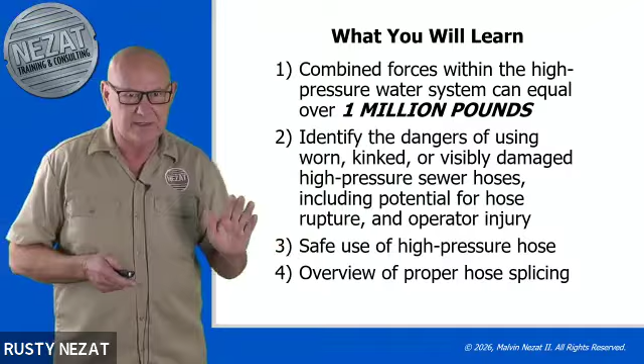So what you're going to learn today is about the combined forces of over 1 million pounds in the high pressure water system. We're going to talk about a damaged hose and using damaged hose, the safe use of high pressure hose, and an overview of proper hose splicing. I know some of you don't do your own hose splicing, but if you do, you need to hear what I'm going to say today.

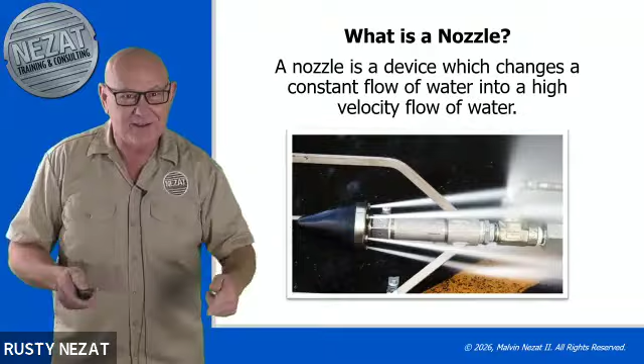So let's start off with the nozzle - that attaches to the end of the hose, this is what goes on the end of the hose. A nozzle is just a device that changes a constant flow of water, 80 gallons a minute, into high velocity, where it comes out really, really fast. The reason being, it goes in through this big hole and comes out through a bunch of little holes - this is about 1 inch, and this hole over here is about a 1/4 inch. So the area is being squeezed down, so the water's got to come out faster - that's what makes it high velocity.

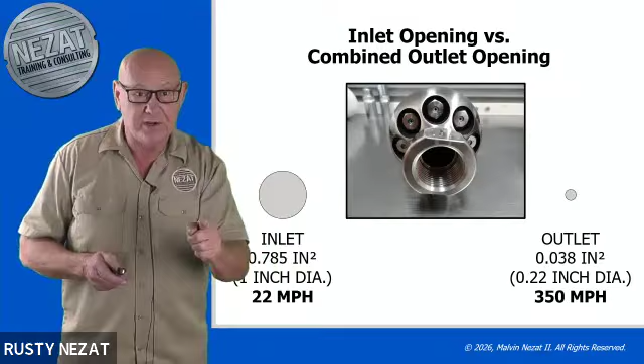So the water going into a nozzle goes in at 22 miles an hour. When it comes out of this nozzle, it's going to be traveling at 350 miles an hour. These nozzles are deadly - people have been killed with these things, maimed and injured. Okay, I'm going to show you a little graphic picture - put your hand over your eye if you don't want to see it.

Oh, not yet. That's the next one.

So, sewer worker killed by a nozzle. In 1999, a gentleman was out there cleaning line, and his nozzle turned and came back on him. I realized what happened because I've seen this happen recently. We were cleaning the line, the nozzle went into a dead end manhole, came up the pipe, and I'm screaming. It came up the manhole, flipped over, and went back down the hole, and now it's going back toward the operator. That's how this person was injured.

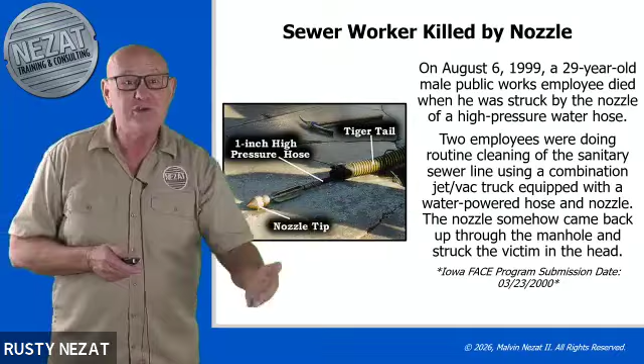When it comes out of the manhole, which they always do when they travel back to you, they're going to turn. They're going to come right up out of the manhole. Bam! Hit him right in the head.

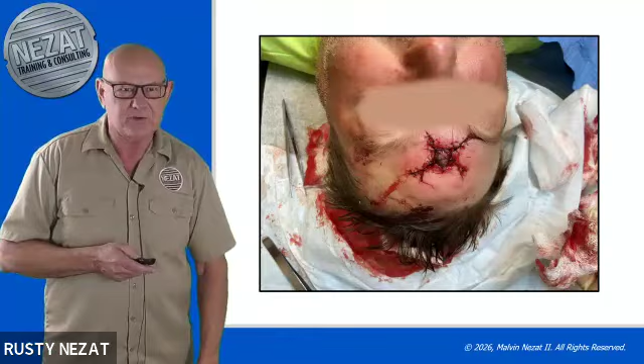So this is an epidemic.

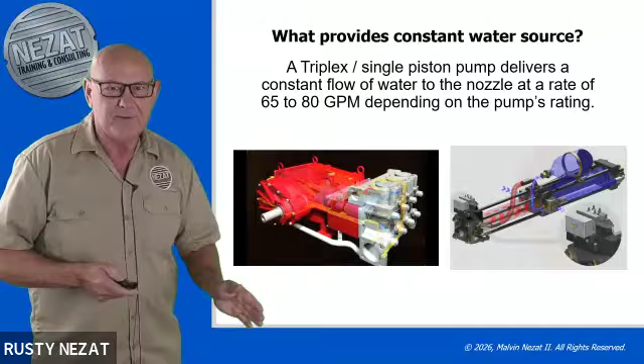So this is where you get your constant flow of water from - from the pump, okay? A unit running like 600 feet of hose at 2,000 PSI can contain 1.2 million pounds of force. You might say, what? My truck only runs 2,000 PSI, Rusty. Yeah, but that's 2,000 pounds per square inch. If you add up all the square inches in the sewer hose and the truck, all the piping, you'll come up with about 1.2 million pounds of combined force.

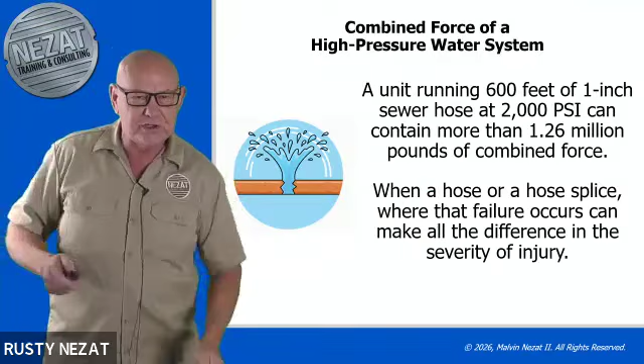When a hose or a splice fails, depending on where it fails, that's going to tell you how serious the injury is going to be. It could come apart in the line, or inside the hose reel. But if it comes apart in that 5-foot area between the ground and the top of the hose reel and you're exposed to it, that's where the injuries take place.

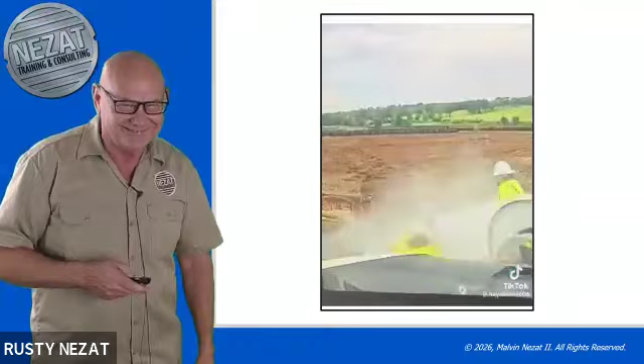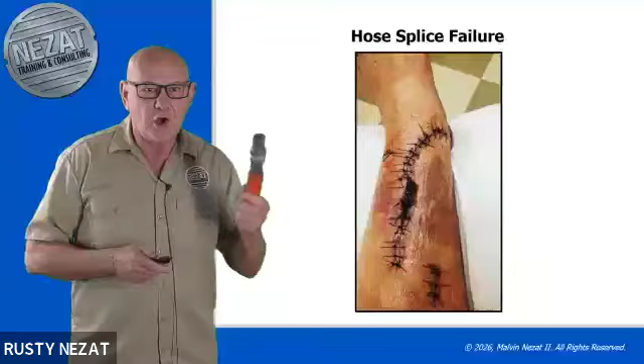1.2 million pounds of force. Now, this was a gentleman I did some training with down in Florida, and he gave me these pictures. After he saw our training programs, our Sewer 102 - one of our modules is about hose splicing - he came to me and said, let me give you my pictures. He said the hose splice came apart as it was coming out of the manhole, and when it came apart, it hit me in the leg.

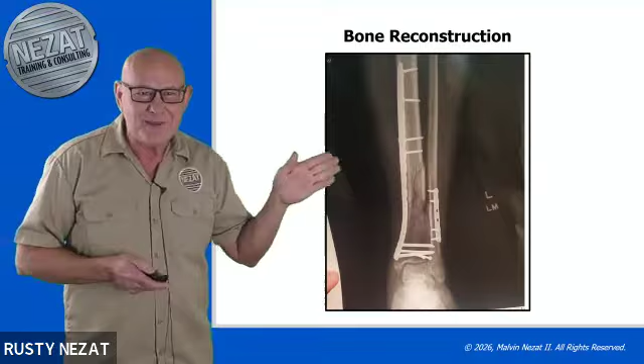And this is what it did to my leg. Now, the reason he's all stitched up like that is because they had to rebuild the structure of his leg. You can see here this bone is shattered. All that had to be put back together, and they got steel plates in there and got him all screwed back together nice and tight. He's back up and functional now. But that was 1.2 million pounds of force coming out of that fitting when it came apart.

Now, let's prevent hose splice failures.

If you're going to make your own splices, you need to use the proper tools and proper procedures. If you go online, there are manuals on how to make proper splices.

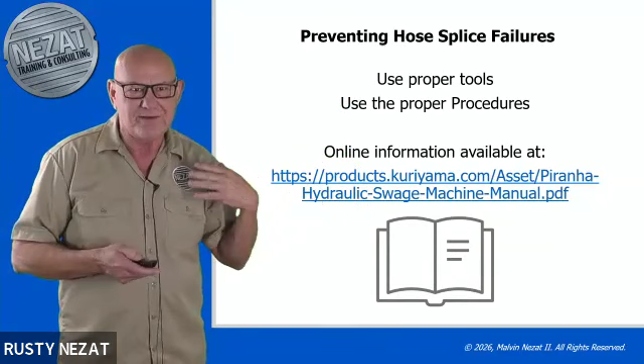The hose we're going to be talking about today is Piranha hose. That's my favorite hose. As I've traveled the country, I believe it's probably the safest hose on the market in my opinion. Now, warning, this is in the manual: failure to read our instructions covering hydraulic swage machine repair manual for usage could result in injury or death.

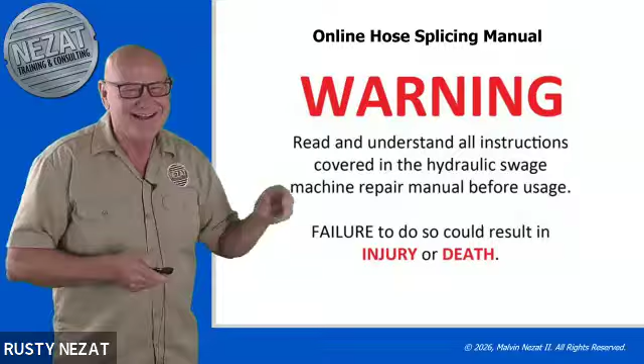Okay, no one's read that probably out there. Anybody read that? Tap me in the chat box. We got a chat box somewhere? Okay, so read the manual before you make hose splices.

Now, this is a gentleman, Michael Jericho. I met him up in Pennsylvania, and I did some training up there. I'm going to let him tell his story about what happened when his hose exploded.

Hey guys, my name is Michael Jericho. I'm an employee of the Pittsburgh Water Department. Been here 29 years. About 20 years ago, I was operating a Vactor, and as I was retrieving the line, the hose split and I got blasted in my right eye with about 2,500 PSI, permanently blinded me. So ever since that day, I've been blind. You just gotta be careful out there. That's all I can say about that.

Thank you, Michael. So for 20 years, he's been blind in one eye because the hose blew up in his face. Now, the hose was probably damaged, I mean it could have been old, I don't know the whole story behind it. But he'd only been working there about a year before he lost his eye, and he's been on light duty since.

So to keep these splices from failing, they came up with a color coding system years ago, because a gentleman put the wrong splice on the wrong hose. It came apart, hit him in the sternum, filled his lungs full of water, and he drowned, standing right by his truck. So they came up with this color coding system to make sure you use the right tools to make the splice. We're going to be talking about the yellow one today, the Piranha.

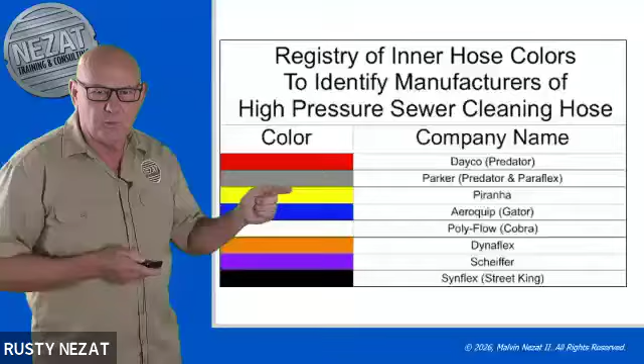That color coding is on the inside of the hose. The inside of the hose tells you whose hose it is; the outside just tells you the pressure rating. So if you have a blue hose, that's 3,000 psi. If you have an orange hose, that's 2,500 psi, and that's typically what you'll find on these trucks. The outside won't tell you who the manufacturer is, only the inside tells you that.

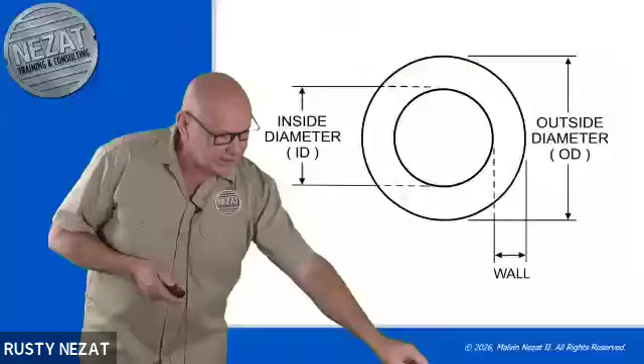The reason for that is because the inside diameter and outside diameter of these hoses can vary in size. So if you put the wrong splice on the wrong hose -- like this one's marked black -- I wouldn't use this black one on the yellow hose because it's not designed for that.

So here's the Piranha setup right here. You have the half moon swages -- you'll need a couple of these if you're making a middle splice, then you'll need this for an end splice. And here's the swaging machine that I recommend; this thing works great, it comes with all the fittings. Then you can put on a male end, or a middle hose mender, or a female, if you want.

Now, if you're having a third party make it up, this might be what you look like when it's all said and done -- you got this big thing here where it's all screwed together. Or if you make your own, you can pick a nice smooth swage. This is going to pull your tiger tail out every time you come through the tiger tail -- it's going to want to jerk it out of there.

So here's our 2,500 psi and our 3,000 psi. Now, if you have this setup, I'm going to try and talk you into going to the 3,000 psi hose because it's safer -- it has an extra layer of insulation than what the 2,500 has. I'm going to show you some pictures that might convince you as well.

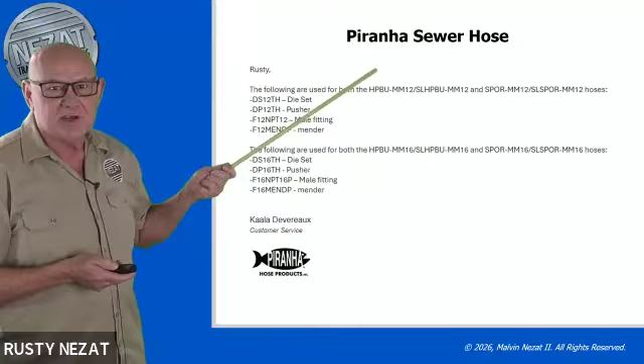Now, you're going to say, well, I got orange Piranha hose -- if I get the blue Piranha, I got to change all my fittings up. No. The Piranha 2,500 and 3,000 use the same splices and swedges. It's all the same tooling if you happen to go to the 3,000 psi, okay?

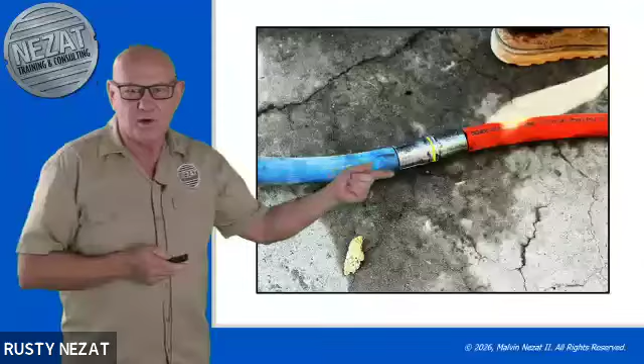And we actually made one up to make sure it worked. There you go. Actually, a city made this up, and they used the orange hose for the leader hose instead of the rubber hose because they were having a lot of issues with rubber hose. So they cut 15 foot of this and spliced it in there and took that big knuckle out of there. Worked out great for them.

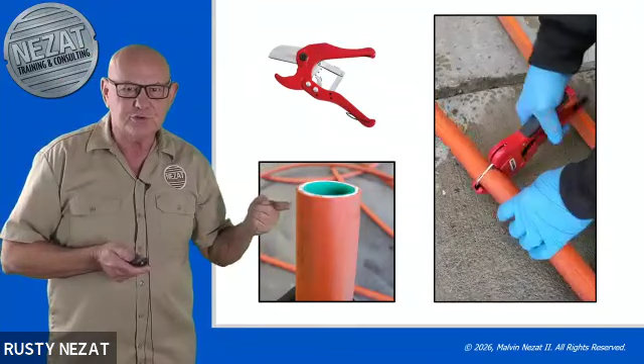Now, if you get ready to cut this hose, you got to have the right tool, okay? You want to cut it like this, the same tool you cut PVC pipe with, and see it slices right through here. This is the best way to cut it if you're going to cut it.

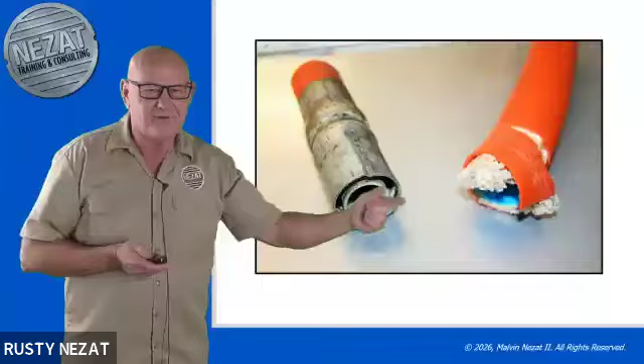Now be careful with the fittings. If you start putting your fitting together and you have this crease in there, this is bad. That means you got the wrong setup because it's going to fail. And this was a failure, and some people were seriously hurt.

Now, the number one thing that I found when I found splices that have failed - if a splice is made properly, you can't pull it apart. You can stretch the hose down to the size of your finger and you can't pull that fitting apart.

But what has happened is when I go out and talk to people in the field, I say, hey, so you had a splice fail. I ask, what happened there? And they say, well, I don't understand what happened, I made the splice and everything. Instead of asking them, I'll say, what did you use to mark your hose with? Did you use a felt tip pen, or a marker? And they'll look at me like the gentleman who had his leg broken. He said, I didn't mark anything.

And see, that's where we go bad, because if you don't mark the hose - which would be 1 3/4 inches, that's a mark. If you just want to get a ruler and mark it, 1 3/4 inches is where your mark needs to be. Because 1 3/4 inches, when you put it together, that's going to come right up to the line. So you can still see the line right there.

So after you put this in the mender, you got two of you on there jacking that thing together. If you don't have a mark on here, you can't tell how much hose is in here. It could be just a little bit of hose in there, and you won't know the difference until it comes apart. All the failures that I've been associated with, that I've interviewed people about, is because they didn't mark the hose. So if you're going to make your own splice, you got to mark the hose.

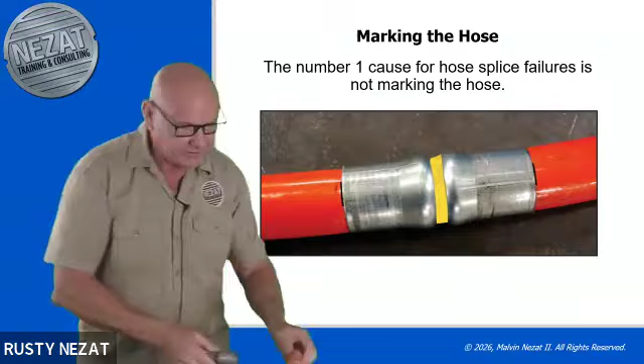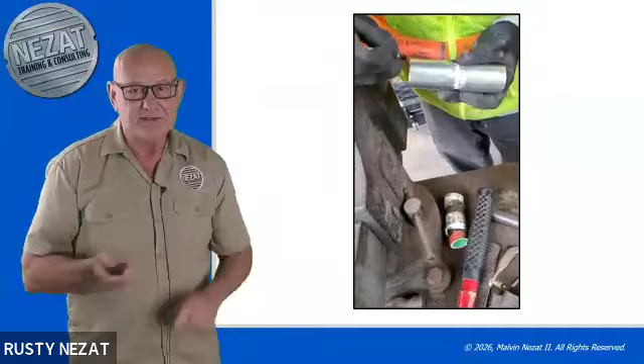Okay, here's a gentleman marking the hose. He just kind of stuck it up there beside it, but I can live with that - that's better than nothing. Or you can slide it on and mark it, or you can measure it and mark it. As long as you mark it before you put it together.

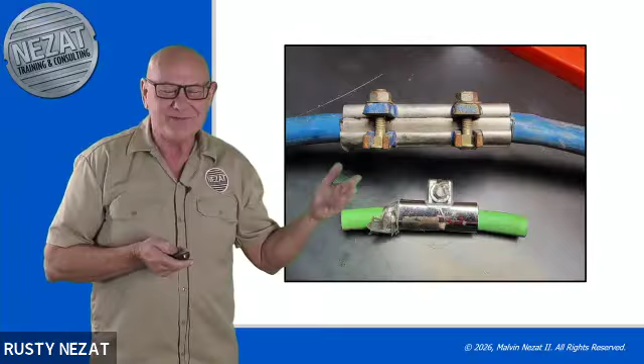Don't do this either. One of the dealers sent me this picture. They had a guy come in with some hose that needed to be repaired, and this is what they were using on it. He cut this off there. He said, no, you can't do that.

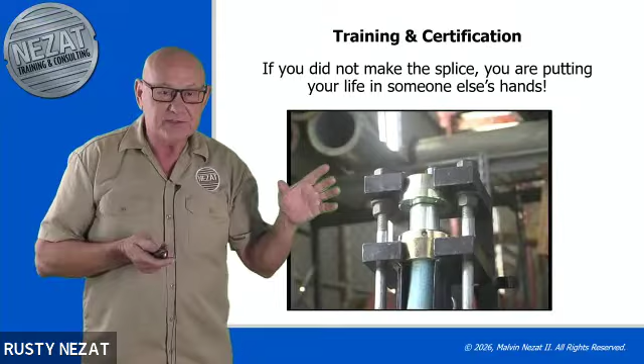So training and certification - we always recommend that if you're going to make your own hose splicing, set up a certification program so that everybody who's certified carries a card. Only those carrying a card are allowed to make splices, because it's a dangerous thing. If you don't make it right, someone could die from it. We have a program at our website - our 101 program, and one of our modules is sewer hose training. How to take care of your sewer hose, how to splice it, the whole 9 yards is all on there with testing. Now, hose protection.

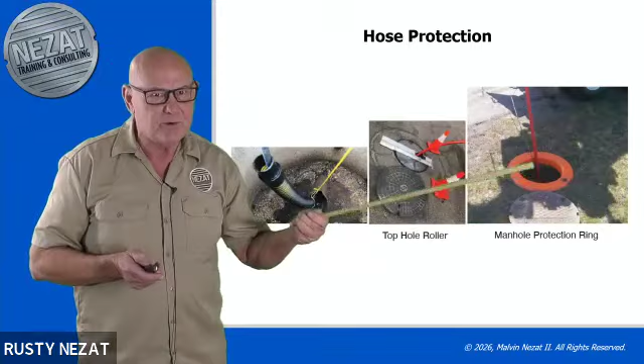So if we protect our hose, we're probably not going to tear it up. Now here's the 3 things you need to carry in your truck: a tiger tail, a top hole roller, and a manhole protection ring. These are usually lacking, we usually don't have these on the trucks, but they're very important. Let's take a look at that.

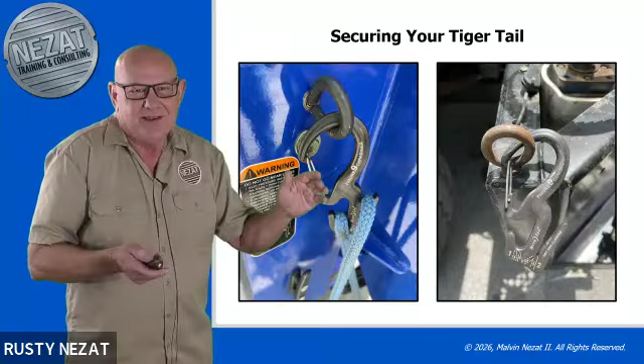On your tiger tail, when you're securing it, you always tie those ropes all around there. This is what I found works really good, it's called a carabiner clip. They just put their rope around it and slide it in the notch, and it was perfect. It never moved. Instead of trying to tie all that stuff up, it works great.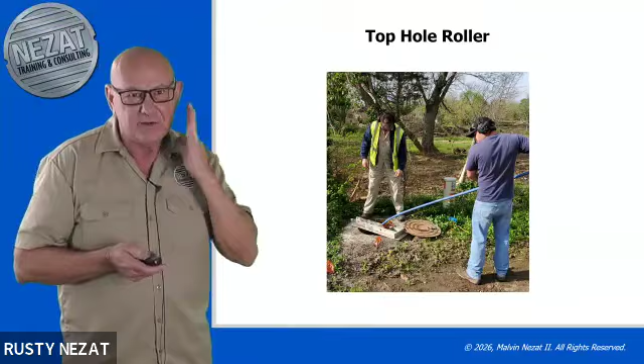Now you need a top hole roller. Top hole rollers are dangerous because when you're pulling back with all that pressure, sometimes they'll pop up. You put the manhole lid on it. I've seen the manhole lid go flying. I've seen people hit in the face with the end of these things and crack the bones in their face. This is what I want you to get.

Get the one with the sliding wedge on it. So you can slide it, see it locks right underneath the rim there, and it locks under the rim here. And you can't pull it out, you'll destroy it before you pull it out. I've seen them pull the tops of manholes off, tall manholes, with this thing before it would actually come loose. It wasn't going to come loose. So that's the safest thing to use.

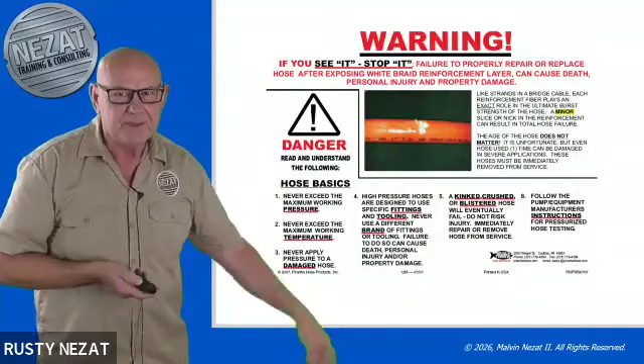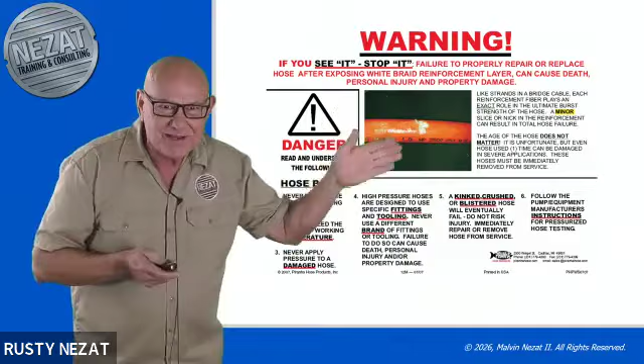Now this is in the manual, if you see it, stop it. Failure to repair or replace hose after exposing the white braid reinforcement layer can cause death, personal injury, or property damage. This is right in the manual, this is from the hose manufacturer. So if you nick your hose, they want you to replace it. And this is what's going to happen to you, especially with that 2500. The 2500 is not very tough hose at all.

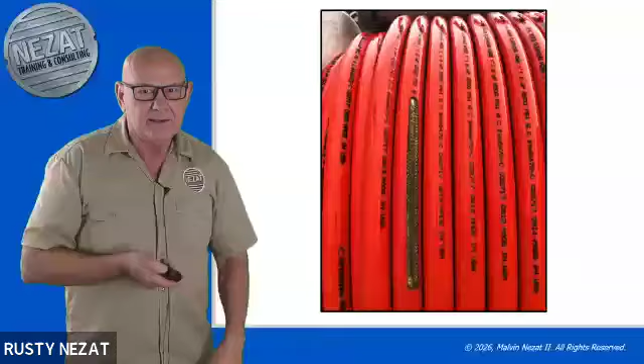Now this, would you replace this? Yeah, this is not good. See all the confetti down there? This is because it was rubbing against the top of the manhole. This is where the manhole protector would have come in, that round orange disc. If you had that setting on top of the manhole, it would not be rubbing against the top up here.

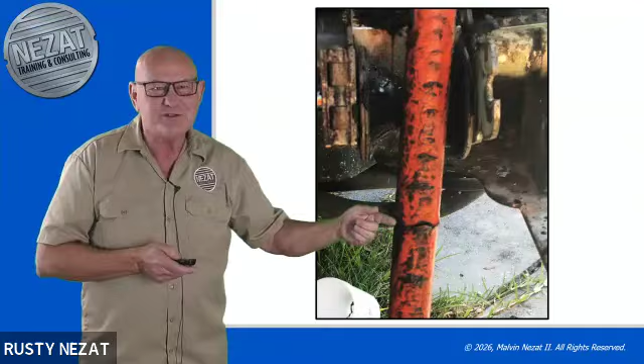Now this right here is where it came out of the manhole and they weren't using tiger tail. See those little chop marks, chop, chop, chop, chop? It was cutting itself as it popped out of the hole. I can look at a hose and tell you how it was cut. Here we go, running over the rim, shredding all this off. Now you want all this plastic on there because you've got a lot of pressure inside that hose, so you want this hose to be as thick as you can.

Here we go, here's another one. No manhole protector. If you had the ring there, this wouldn't have happened, it'd have pushed it off the edge. Look at all that confetti coming off there. You don't want that, okay?

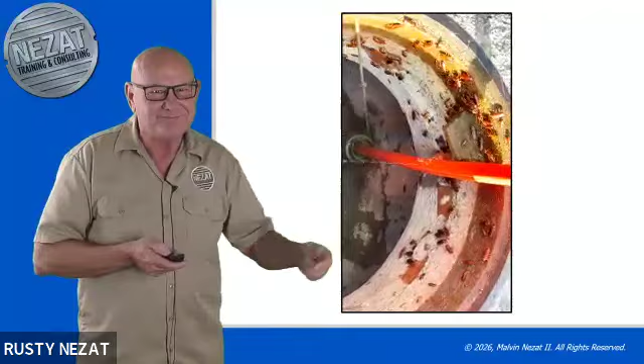And then sometimes you can get a rock lodged inside of your tiger tail, and as you pull it through, if you start seeing scarring on your hose and you don't know why, stop and pull up your tiger tail. You could have a big rock lodged in there, okay?

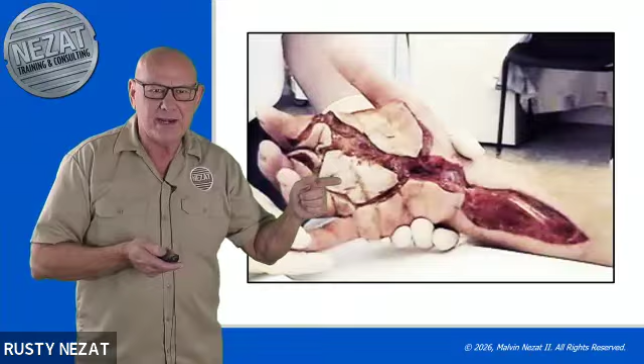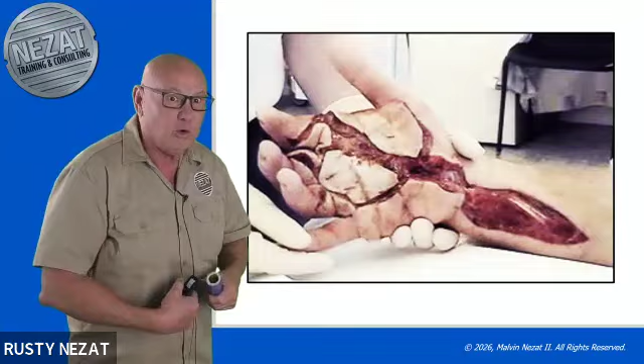Now, I see a lot of you out there, I'll go out and do field training, and you've got that hose just rubbing up against your belly. You're like, yeah, I got that hose, man, I'm level 1, I've got it up against my belly. If that hose explodes while it's up against your belly, you've got 1.2 million pounds of force, and if the hole is on the side by your belly, it's going to be a really bad day. You may not survive that blast.

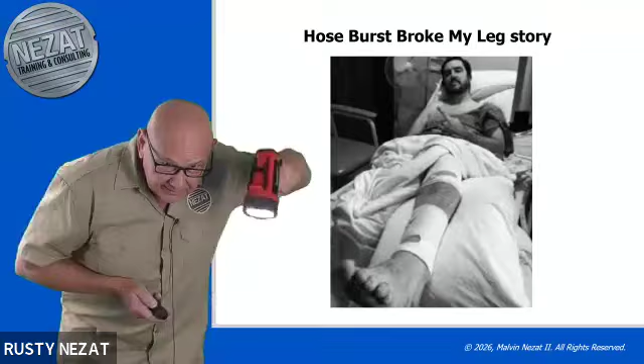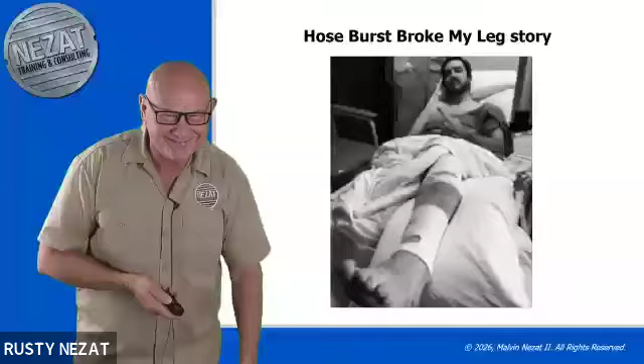This guy here, the hose hit him in the head. His hose exploded while he was looking down the manhole with his light. He told me the story: he was looking down the manhole, the hose exploded, hit him in the head. Well, the rest of the story was, when it hit him so hard it knocked him out into traffic, and he rolled underneath the trailer of an 18-wheeler, and it broke both of his legs. It messed up his face pretty good, too.

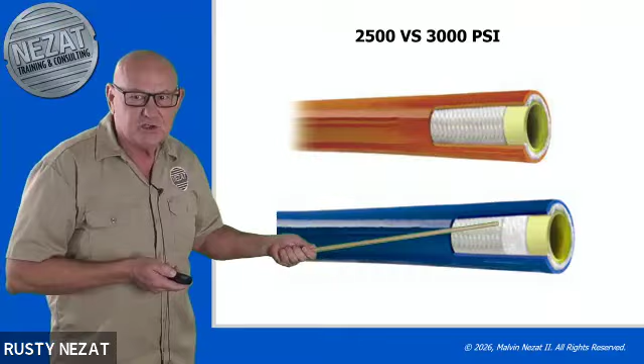Now, this is why I want you to use the 3000. The 2500 is a single braid. The 3000 has two braids of hose on there. See the reinforcement here? So you've got two of them. Even if you tear the outer cover, the secondary reinforcement keeps the primary reinforcement in place. This one doesn't. Once you cut this orange hose's cover, you've got nothing to keep this in place, because the inner tube inside, where the water runs through, is only good for about 40 to 50 PSI by itself, and then it would explode. So that's just a carrier of the water. All the reinforcement is in that white fabric.

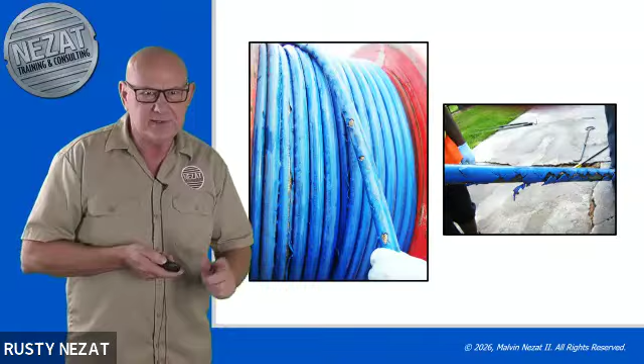This was a contractor I went out to do training with, and I said, we're not using this truck with this hose on here. I said, how long have you been running like this? He said, I've been doing this for a year. I've had this truck for a year. I've never put new hose on it. It looked like this when I got it. I said, well, we're not going to operate it like that. He said, well, I could probably get another year out of this hose. And I was like, whoa, man, that's amazing. That's when I was sold on the 3000 PSI hose. He didn't have any problem running this. And when we pulled all that hose off, it didn't have any splices in it. It had never been spliced.

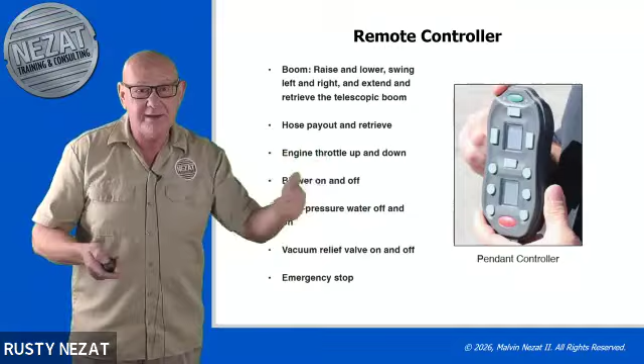So what I want you to do is get your remote controller on these new trucks. They all have them. Get everything set up. Start running your hose in and out. Get your remote controller and back up a little bit. Keep a little distance between you and that hose. Look down in the hose with your handy dandy light. Don't clean without a light. You need to see what's going on. You look down in there, then you kind of stand back up. You've got your controller going beep, beep, beep, in and out, in and out. These controllers run all the different functions that you need. That keeps you away from that high pressure hose. And if you're an old guy like me and you don't know how to use that damn controller, can't figure out all them buttons, give it to your helper, because he's probably 22 and he's got one of those Xboxes. He'll show you how to use that thing.